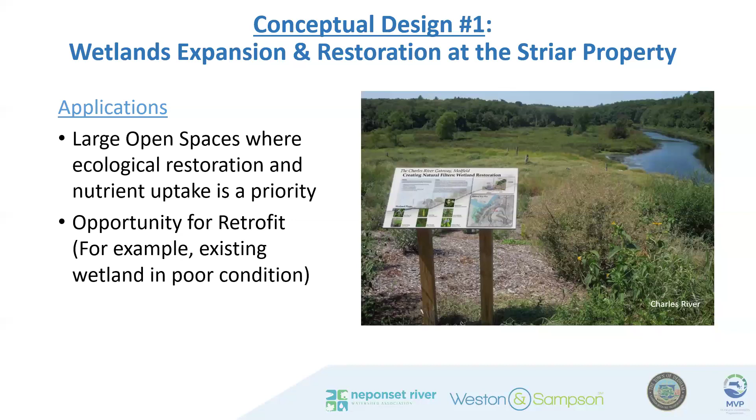Typically when looking at a wetland expansion or restoration, you're looking for large open spaces where this kind of restoration is a priority. At the Striar property, down by the Sprague Street culvert, that's already a wetland system with a wide swath of open area where we could potentially put this type of application. There's also the question of an application for retrofit. Based on feedback from you all, there used to be a lot more storage there, so that's a good opportunity to retrofit, expand, and restore what had previously been there.

There are also co-benefits to doing a wetland expansion and restoration. You can capture large volumes of stormwater, you're improving water quality, and these are natural systems that have been doing this for millennia, so why not expand that type of system? There's more ecological habitat restoration, and lower long-term maintenance because it's a natural system—eventually nature will take care of it.

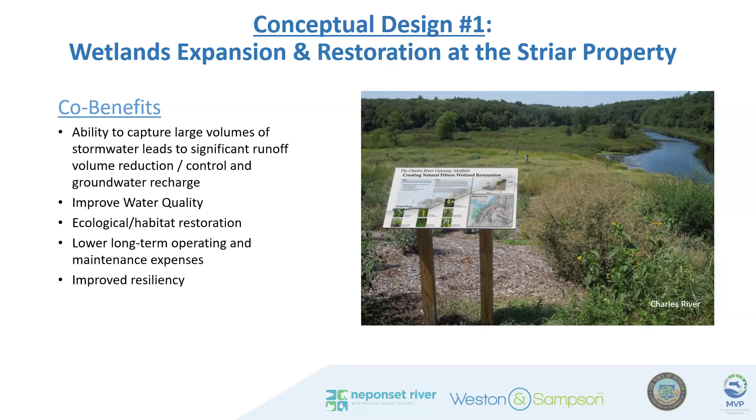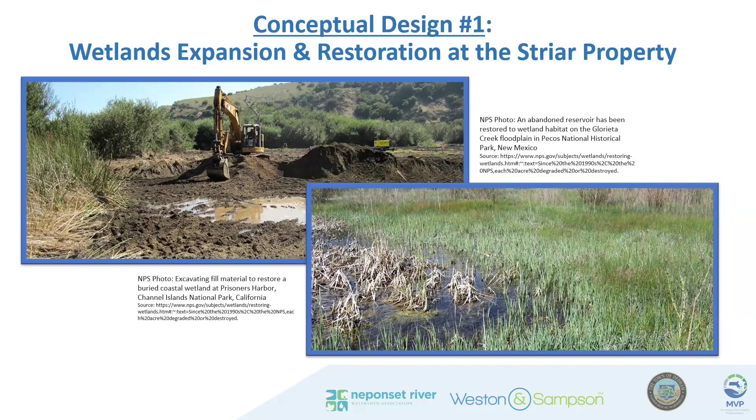We also wanted to show some example photos of different wetland restorations that have been done, these by the National Park Service, so a bit more wide-reaching. In the bulldozer photo, you can see excavation of material to restore what got buried—similar to something at the Striar property that's been filled in with sediment. In the lower right, you can see a restored wetland, bringing it back to what it used to be and expanding that flood storage potential.

So this is just a concept, very high level, of what this could be. When looking at the Striar property, we're focusing on the wetland system closest to the Sprague Street culvert. This green area here is the existing wetland boundary based on our wetland delineation, and that's what we'd focus on to restore.

When looking at a restoration, we're looking at removing the sediment that has filled in there and trying to increase the capacity of flood storage in that system—removing the soil and increasing the amount of water that could go there during extreme rain events. The screen here shows the wetland expansion: thinking about the elevation of the existing wetland, how do we expand that out to make more area where water can fill in and create more of those wetland systems.

So taking what we already have and making it a little better, a little more resilient. This darkest green is bringing it all back to grade—tying this back into the existing system so it can all tie together to improve resiliency here.

Can I ask one question about that? Yeah, absolutely. We do get, from time to time, recently, flooding onto Sprague Street.

Is that being mitigated? This is just the concept level—we're looking at what could be done on the property. As part of the next phase, we're looking at different options, including how Sprague Street, the culvert, and the road interact with this system, as part of the feasibility study. For this concept, we just looked at what's there now and what it could be in terms of the wetland system, but looking at the Sprague Street culvert specifically was not part of this concept.

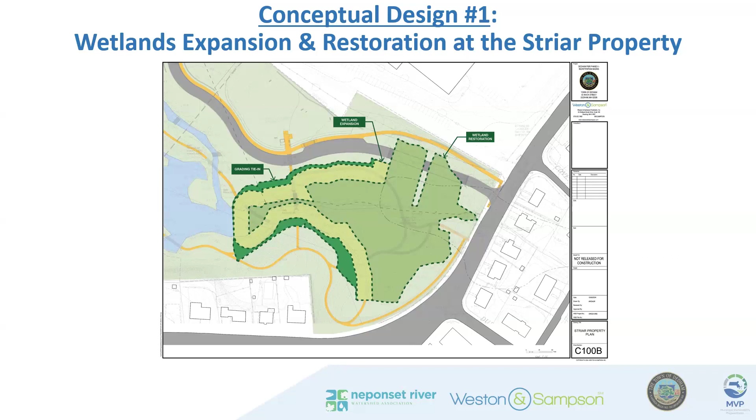It does flow down from that neighborhood, it does come down into this area. This is one of the concepts the town is looking at, to alleviate the issue further downstream, correct? All right, I think I'm caught up. No worries.

I'm going to move on to the next concept - the model. We've expanded on this in previous meetings, so we can hand out more detailed information, but basically we input this conceptual design into the model to see what kind of benefit we could get. The model, for anyone who doesn't remember, is a model of the entire Neponset River watershed developed under this grant. It inputs town drainage systems and existing water bodies into a computer model, and we run different rainstorm design storms into it to see where flooding pops up and how much there is.

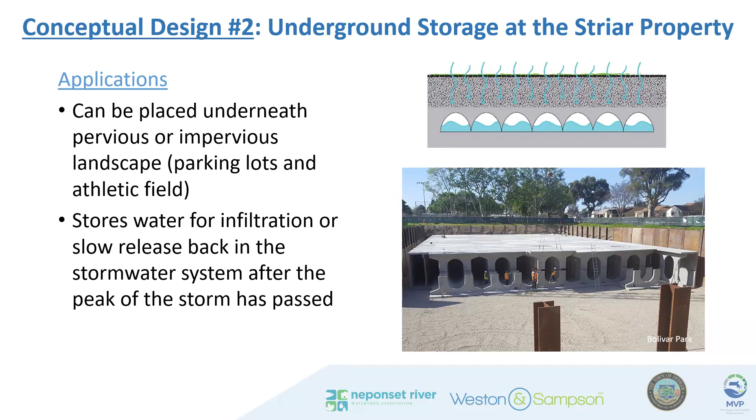There are co-benefits to this as well. It's less of a green system than a wetland restoration or expansion, but it does have the ability to capture large volumes of water. You can customize it, make it as big as you're willing to pay for, more or less, and as site conditions allow. And there is less effect on future programming.

I know the Manor project does have certain uses pre-programmed. So this has a bigger option to be placed in other places within the property, or whatever your development is, you do have the option to put this there.

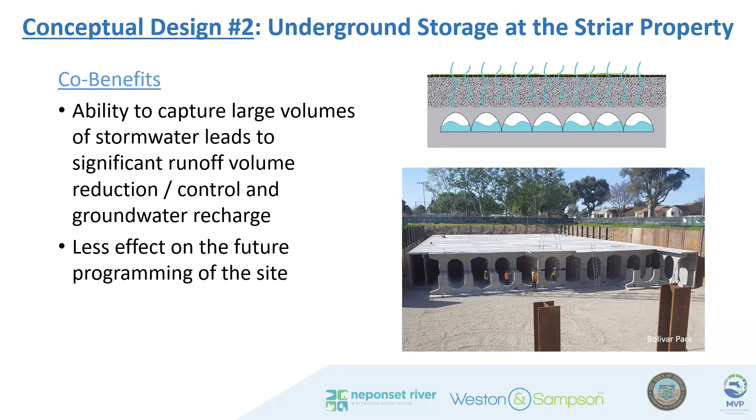Looking at just the concept, this green is still the existing wetlands. You can see it in space. This wouldn't change at all, we wouldn't be affecting this at all. And then you can see this blue square up here — this is just a potential place where we could be putting this underground storage.

All it is, more or less, is a box, and it's typically a proprietary system. It would just store the water underneath the ground. Then, depending on the system, it would either infiltrate back into the ground, or slowly trickle back out after the peak of the storm has passed.

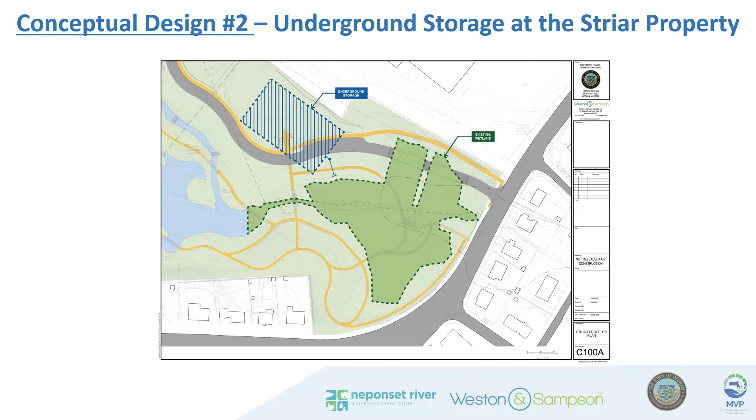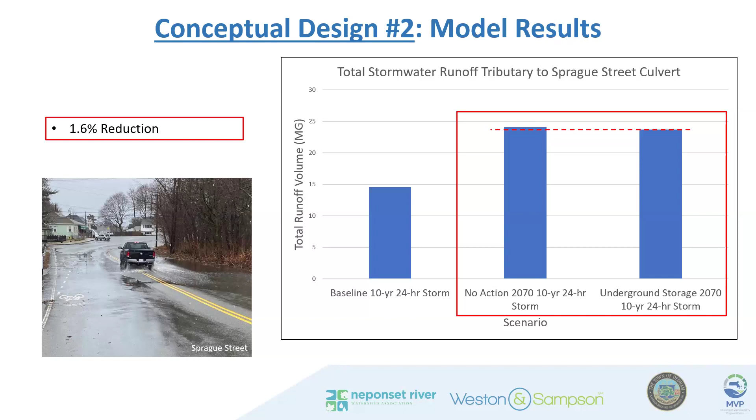So we also modeled this with the same parameters, and it showed a 1.6% reduction, so a little bit less. That pretty much has to do with the total storage capacity of a system like that. But again, these are just the first stages of the design, so these numbers aren't set in stone, and they could vary as we progress these designs along.

So initially we were going to look at three different designs for the Striar property, but after some resident and town feedback and identifying some problem areas, we looked at another location — some of the outfalls discharging to Fowl Meadow.

To answer the question a bit about Fowl Meadow and how it works — a lot of the Manor drains to Fowl Meadow, and then some, or all, of that goes to the Neponset River. Some of the culverts are owned by MBTA, which the town is working with, and some of the outfalls are owned by the town. So these outfalls owned by the town are ones they can do something about.

One of the projects we're proposing is daylighting these outfalls. Daylighting an outfall means removing the underground pipe and making an open channel. Some of these outfalls discharge 100 yards into the woods on an old paper road that was never built on. The idea is to open these areas up and make a longer channel, which provides a little storage, not as much as other projects, but reduces that downstream restriction.

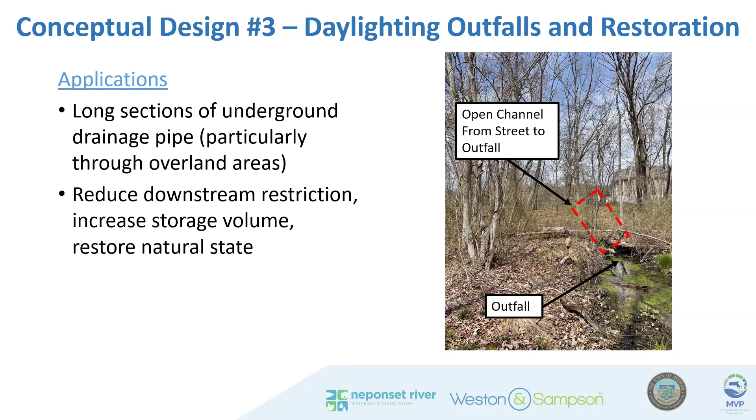This hopefully increases the efficiency of that individual stormwater system, so those catch basins don't flood as much and the water can get out a little better. This kind of project has co-benefits, like Alex mentioned: improved water quality, opening up to a natural state, infiltrating some groundwater, and restoring habitat. It goes into the Fowl Meadow, and you can restore that to before the pipe was there. Lower maintenance costs too, since if you don't have a pipe, you don't have to maintain it. And it improves resiliency.

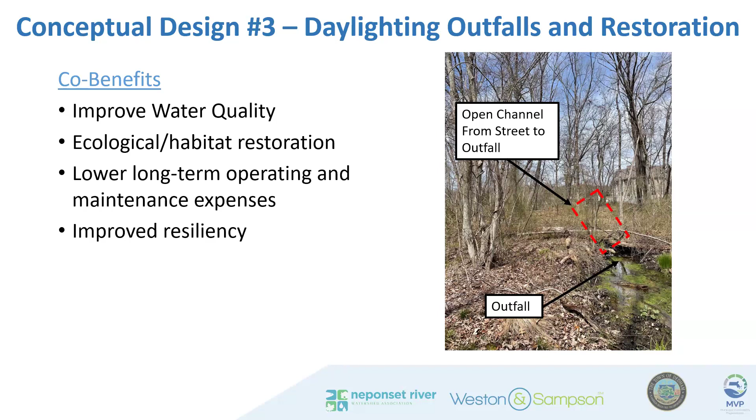Here's an example, from the Manor neighborhood. If some of you recognize it, this is on Greensboro Road, done by the town a few years ago. As you can see, there used to be a pipe—the picture on the left is from the woods looking toward Greensboro, and on the right is from Greensboro looking into the woods. You can see it opened up and improved storage, getting rid of an old underground pipe, so there's not as much restriction downstream of those catch basins and drainage systems.

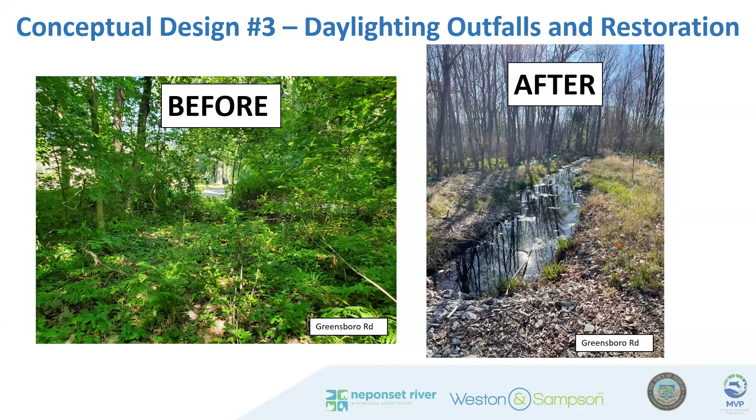Here are a few of the outfalls to Fowl Meadow. In the bottom left is actually that Greensboro outfall we just looked at. There is still some pipe downstream of that, so we would look into daylighting that portion of the pipe as well, plus a few other outfalls to the Fowl Meadow.

As you can see in some of these pictures, some of the pipes are a little submerged, or sediment has built up, with some vegetation. So really, opening these areas up and trying to promote flow from those drainage systems to help with those immediate upstream areas is the goal. From feedback on the Greensboro project, it seems like that has helped a little with some of the immediate flooding upstream of that area.

Yes? Can you tell me where that Greensboro spot is in the Manor area—I can't see where it is. Is that off of Trenton Road? Is it on the back end? Is it on the other side? I can't figure out from that picture where you're talking about for those other three. I live on Holmes Road, and I can't tell by that diagram where that is in my neighborhood—it's so small. Maybe make it bigger, or do something, that'd be great.

I don't know if we can zoom in on this, but I can go through with the cursor. Down here is pretty much the end of Greensboro where that daylighted outfall is. Then it basically goes down to Hastings, and then this is Trenton Road. Thank you for the pointer. Then the Fowl Meadow, the big wetlands, the wooded areas, are kind of all behind it. I'm not sure where Holmes is, if we can see it on that.

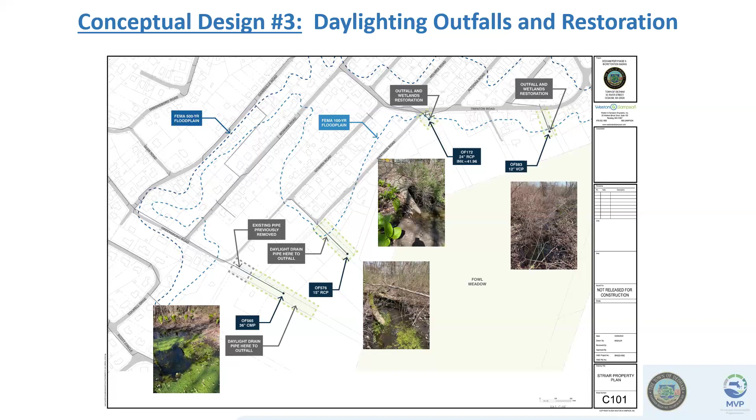Was there any thought given to combining both and doing both at the same time? Yes, so I think as part of the next round, we have a couple of both of these projects that we want to get more funding for and keep pushing forward. Each option we put up there only has a single digit percent chance, correct. Yeah, so the goal would be to keep pushing as many of these forward as we can.

I think we can talk a little about next steps and moving these projects to design and construction. So all along, as part of this grant application, we were looking at 3 concepts like we talked about. Originally, we were thinking those concepts would lie all exclusively on the Striar property. Since then, based on feedback from this meeting and prior meetings, the outfall daylighting concept kind of came to light too.

So when we're thinking about what we're moving forward, we want to really think about the goals of the program, right? What projects are most likely to get funded. Through the Municipal Vulnerability Preparedness Action Grant Program, it's fostering projects that promote climate resiliency, and really the core of those projects is nature-based solutions. So something like the underground storage project, not that we couldn't put that forth, but it might be less likely to get funded because it's considered more of a gray infrastructure type of project. So in terms of thinking about this next application and what we're putting forth, again, we want to promote projects that we think are going to get funded through the program.

This is a great program, and we're even seeing other projects in other communities actually get constructed. They want to see subsequent phases of these projects continue to move forward. So I feel like in that sense, there's lots of great funding available.

We talked about those 3 concepts that we presented, and the intent still by the end of June is to move one of those concepts forward to a 25% design. I think at this point we are leaning toward the outfall daylighting project, but obviously wanted to present and get more feedback from the group as well.